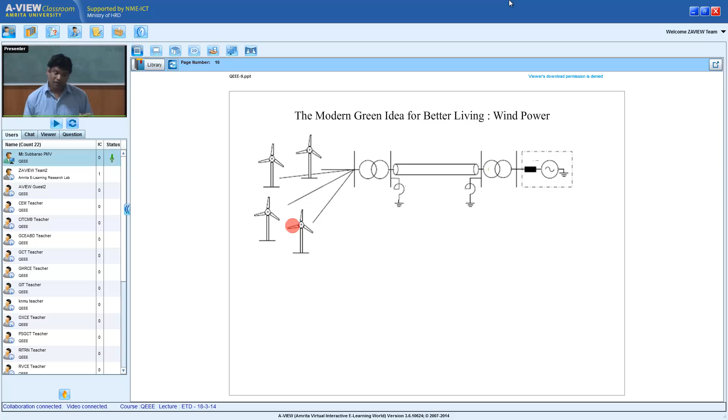You see this one. A system will change its state. The system is ready to change its state. But whenever there is a change in state of the system, there are some happenings. And these are the happenings which will change our lifestyle. You need to assess what happening you want when the system is changing state. Or for a given happening, what kind of change of state in the system will be beneficial. In fact, the first culmination of all the knowledge is to create these kinds of things.

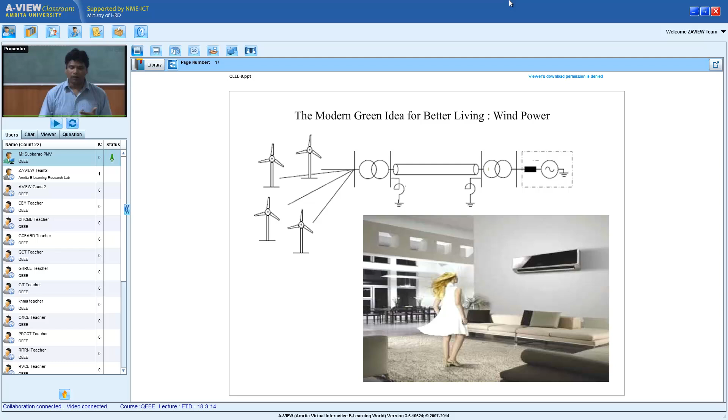That's why I'm questioning, what is happening whenever there is a change in state? Can you recognize what all can happen? Then you can choose. Sometimes I want this to happen, sometimes I want that to happen, because in summer I want this, in winter I want that. Some other weather, some other requirement. Very important: the system will change its state in PVT, pressure, volume, temperature. But when it is changing its state, you are looking for different benefits. A system may change the same state from 1 to 2, but sometimes you are interested in one happening, sometimes in the other happening.

You see, are any of these happenings useful for the engineering world? That is the question. Why am I making the system change, why am I concentrating on the change of state of a system? Why are all these happenings useful for the engineering world? What are the main engineering requirements?

Does it consume any resource? Then I need to think techno-economically. Does it consume any resource for which I have to pay money, or is it naturally coming? If I have to pay for the happening, then I have to be very careful about what I am losing and what I am gaining.

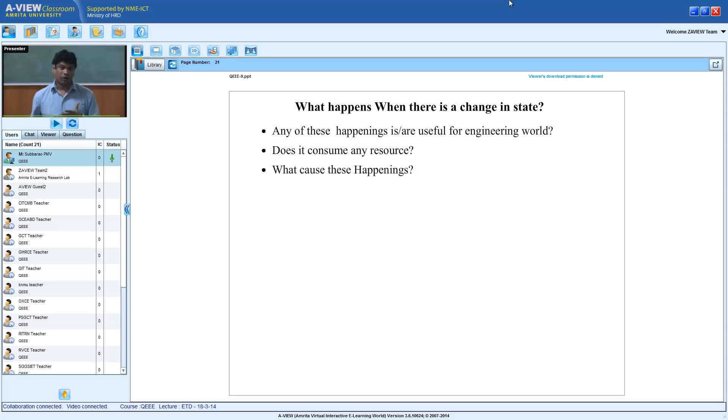They evolved over a few hundred years to come up with such a beautiful idea called a badgir. How many generations worked together to perfect such a nice system so that they could live happily in such a hot, dry environment without any problem. Only then did they start living happily. Otherwise, they would have been subjected to many diseases.

All these happenings are creating a thermal inequilibrium, isn't it? The wind has a uniform temperature, but the moment there is a wind catcher in between, there is an inequilibrium created in the wind. The wind is now changing its temperature - thermal inequilibrium. I'm purposefully creating thermal inequilibrium because that is good for me.

I was subjected to a very hot environment and I'm not happy. I want to change, disturb this equilibrium, and subject it to cold air. Then I'll evolve into the next inequilibrium. So to enjoy, I am creating a thermal inequilibrium, or sometimes I may create a mechanical inequilibrium. If the wind has uniform velocity and uniform pressure everywhere, I get nothing.

Suppose if I put a windmill, what will it do? It will create a mechanical inequilibrium. The wind will lose its kinetic energy, the wind will lose its pressure, and because of that, what am I getting? The difference of energy I am getting goes to the rotor, and that rotor can be used to drive the generator - I'll get electricity.

So by changing the temperature of the wind, I can enjoy a nice environment. By changing the mechanical properties, I can get electrical power. Sometimes I may change the chemical inequilibrium too.

After catching the wind, if I don't think about the wind passing over a water pool, I won't get any benefit. The whole idea of constructing such a beautiful wind catcher will not serve its purpose. Imagine that wind catcher with and without a water pool at the center. If there is no water pool in the center, the people living in the house will be subjected to some air velocity, but that air is hot, and that is not a good thing.

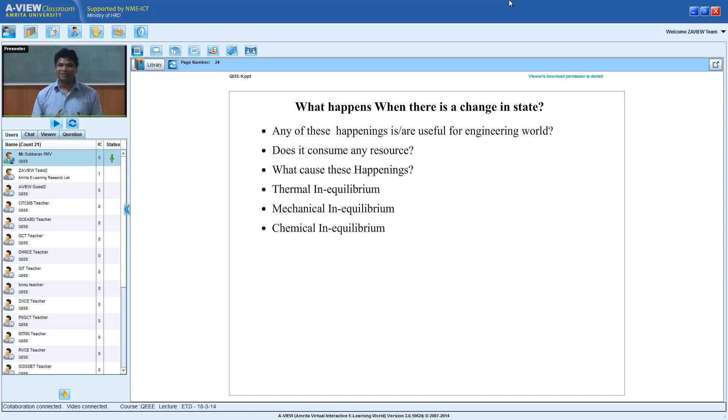So unless I create an inequilibrium in the system, I cannot enjoy. All my enjoyments somehow disturb the equilibrium. The zeroth law talks about things tending towards equilibrium, but a human wants always the opposite of what happens - whatever he can enjoy is by creating an inequilibrium.

He cannot be in equilibrium with a hot environment, and he cannot be in equilibrium with a cold environment - both are dangerous to him. He has to create an inequilibrium, which requires a change of state, which requires consumption of a resource, and which requires a physical structure to be invented, like a badgir.

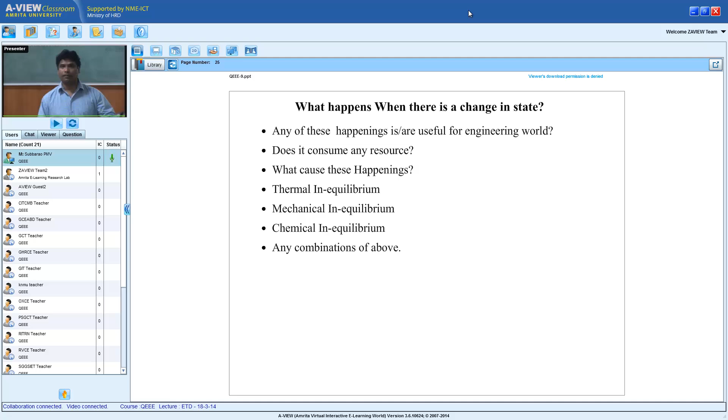So without inventing that, it just doesn't happen. So any combination of the above can occur - I may have a thermal and mechanical inequilibrium, I may be interested in a mechanical and chemical inequilibrium, or a chemical and thermal inequilibrium.

So you can have a different thing. These happenings are actions, path functions, or interactions. All these happenings are kind of an action - something happening to my body, something happening to the air, something happening. All these are called actions. Strictly speaking, all these happenings are literally verbs, not nouns at all. And they're all totally a path function.

Same wind velocity, same wind kinetic energy. In one case, I changed the path and got a cooling effect. In the other case, I innovated a wind turbine doing some other process - I'm getting mechanical power and electrical power. So the happenings and actions depend upon how you take the system from state 1 to state 2. Whenever you change state 1 to state 2, the path followed in between will decide what kind of happening occurs - is it required or useless.

Now, these are present only during the change of state. All these happenings will occur only when there is a change of state. If the system doesn't change its state, there is no happening, no enjoyment, no inequilibrium. Unless there is an inequilibrium, there is nothing like a happening which I enjoy. You cannot generate mechanical power from the wind unless you change the state of the wind. You need to see all human activities - understand something, try to do the opposite, then you will enjoy the deal.

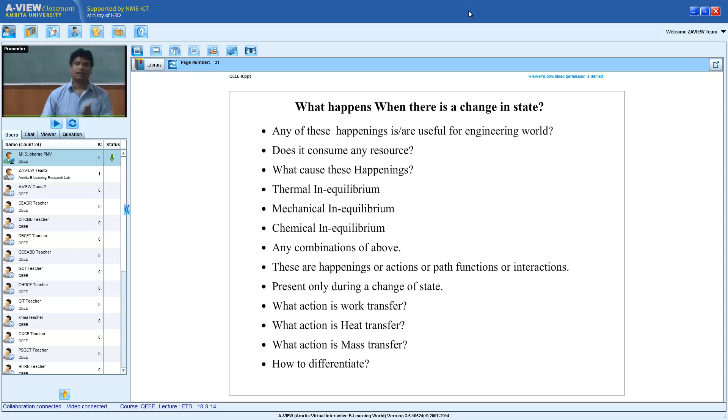So that's how you need to know what these three actions are, how to precisely identify them, and how to differentiate whether a given happening is a work transfer, a heat transfer, or some kind of species transfer. Mass transfer means a kind of concentration inequilibrium process.

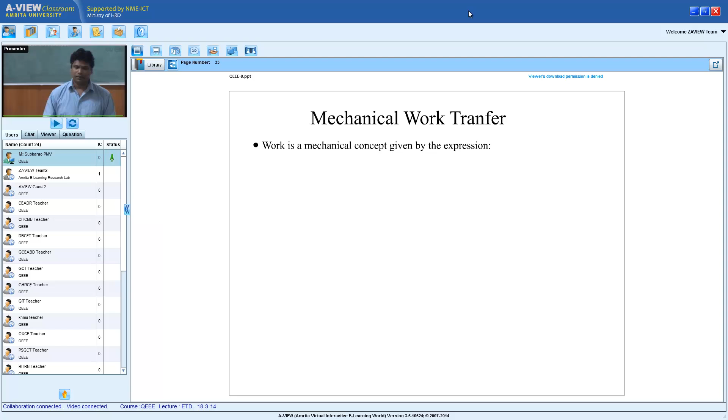Now first let us talk about the mechanical work transfer which is well taught to us in school. Perhaps as I was saying, the entire reason thermodynamics evolved is people wanted motion, and motion comes out of mechanical work. That's how even in school, work is a mechanical concept given by the expression - what is work defined as? Work is if there is a force, if the force is continuously getting displaced...

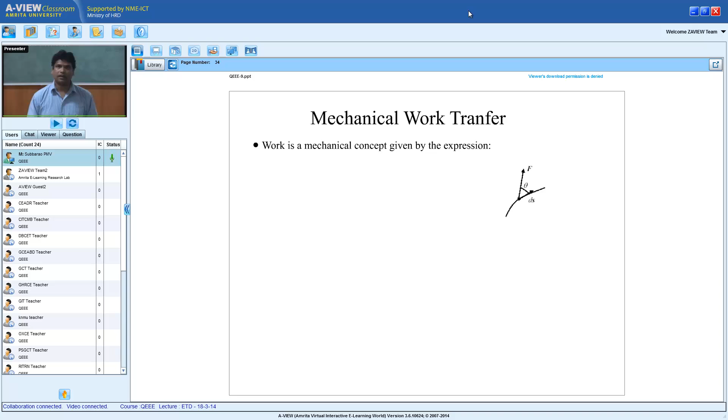And if the force has some component in the direction of motion, then only there will be a work transfer. All of you know work is said to be done by a force when there is a displacement of force in its own direction. If the displacement of force in the direction of force is zero, then there is no work done at all - there has to be a displacement in the direction of force. That is what is called mechanical work. Most of us are interested in this kind of mechanical work to start with.

A small infinitesimal work done is defined as the dot product or scalar product of a force vector multiplied by a small displacement. Here ds is the infinitesimal displacement and f is the magnitude of the force, and work is defined by the dot product only. Why? If the force and displacement are not in the same direction, you get nothing. That is the mechanical work which we are not required to consider now.

Now we need to understand: if I want a finite work, both force and displacement are vectors, and by changing the displacement of a force continuously I can get work, or by changing the force value continuously I can also get work. There are two ways to get work. So I need to understand explicitly how I can generate a force using a natural resource, how system pressure, volume, temperature will create a force. At the end of the day I want to create force through a system or substance, and that's how one has to have a global link between ultimate mechanical work and what the system can generate.

All of you know F is a force vector, S is a displacement vector, then work is a scalar product. Unless there is a component in the direction of force, there is no work at all. The dot product is very important, cos theta. The force component along the displacement vector only can do the work, isn't it? If the force is totally in a perpendicular direction, you can't do any work at all, and you need to be very careful in designing everything.

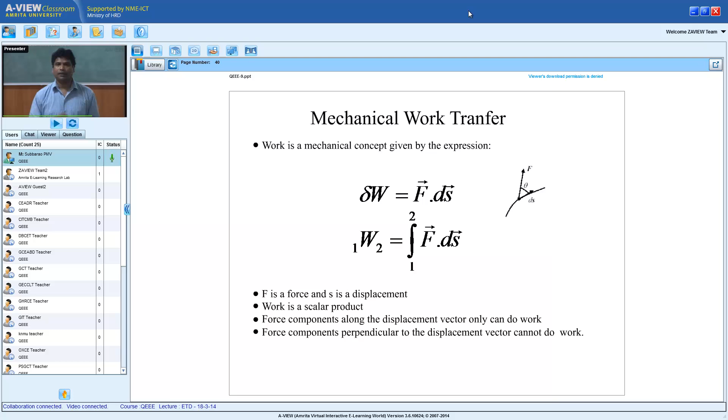So the force component perpendicular to the displacement vector cannot do work at all. One has to understand this, and this relationship will be useful to find the work required to raise a weight. Let me explain this entire thing in a simple way. Give me the whiteboard.

Now you see this simplest device, after all how much engineering, how many years we'll learn. Let us say a person is carrying a big suitcase on his head and walking through, and fundamentally he is not doing any work at all. If at all you want to prove that he is doing work because of the weight, the friction force between his leg and the floor is increasing. Higher the force, higher the displacement. This is the most ridiculous way of lifting a weight.

Again, many people say he is not doing work at all because the weight is in this direction while he is moving in another direction, and this is the displacement vector. Now what is the best way to do this? This is a stupid way, and it took so many years to invent a better thing.

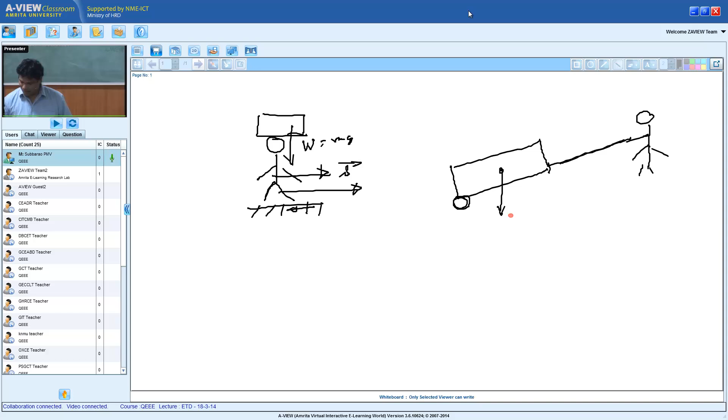What is the better condition? If you pay a little more, there are wheels and a handle, and you will nicely walk through carrying this one. Now you see, the weight is in this direction, and depending on the weight equal to mg, there is a friction force which is coming - this is the rolling friction. Now why are you doing the work? Because there is a displacement in the direction of the force. Unless you apply a force equal and opposite to this one, you cannot move it, isn't it?

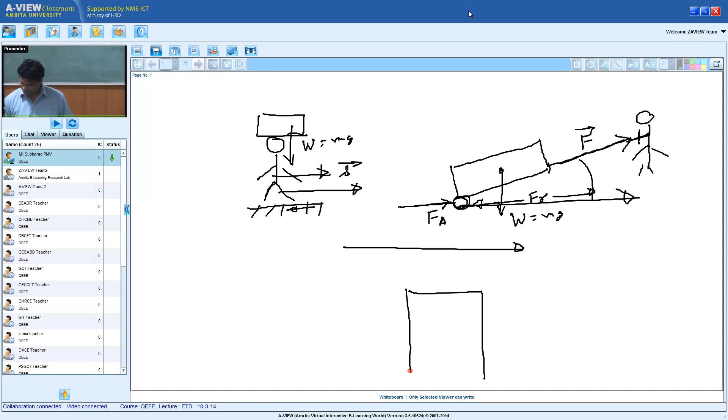So this is the extra force you are applying, and that force gets displaced in this direction. At the end of the day, what is the force doing the work? You are applying a large force vector, and only the component in this direction does the work. Unnecessarily there is stress on your hands because of how you're carrying it. What is the most modern, costliest suitcase you have? A 4-wheel suitcase with a wheel here and a small handle like this, and the person will just push it. So the total force which I am applying with my hand or muscles is doing work.

And to do this work, I need a little energy to be consumed. I need to spoil some muscles. Now, so in all the cases, I'm doing the work. I'm shifting the entire suitcase from place 1 to place 2.

Now you see this idea, appreciating the scalar product, and I wonder how many years human intelligence takes. Why did we not invent the four-wheel suitcase immediately? Okay, so very costly suitcases have this four-wheel thing. So the ultimate work required is the same, but depending on this one, you will strain somebody. This fellow will suffer a lot to do the work, and this is relatively easy. This is the easiest. Even an old person can take a large weight without any problem at all.

So all this is because the work which you are doing is only this work. So this is the only work you are doing, and if you are applying a very large force, but the component of that force in the direction of displacement is very small, obviously you are wasting all your resources. You are troubling yourself, you are breaking your bones. All this is a stupid thing. So that's how the scalar product has so much implication.

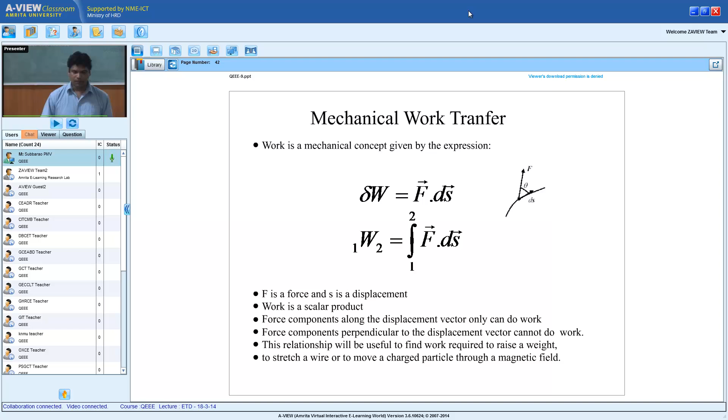That's how thermodynamics came up with a nice concept to have a broader version of this particular work definition. To stretch a wire or to move a charged particle through a magnetic field, all these things are a kind of force into displacement. Either raising of a weight, stretching a wire, or a charged particle moving in a magnetic field, all these are the scalar product of force and displacement. So thermodynamics wanted something more global. Thermodynamics has a wiser and broader definition.

And only force into displacement as work is not enough, because many times things may not be straightforward. That's how a thermodynamic system doing work is defined very differently: how to define work in terms of system, surroundings, and properties of the system. Unless there is a change in a property of a system, there can't be work, there can't be a happening. And whenever there is a happening, how is the system changing, how are the surroundings changing, what is the interaction between them? Force into displacement doesn't talk about all these things.

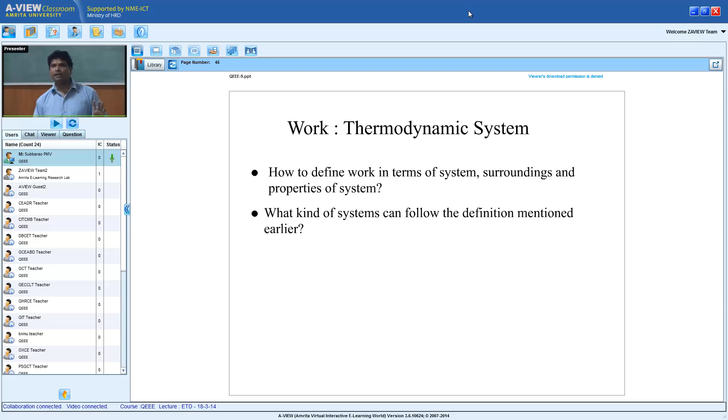Whenever I say that work is the scalar product of force and displacement, I'm not bringing the holistic way of developing a system to do work. So thermodynamics wanted a more perfect definition. And also, what kind of systems can follow the definition of mechanical work? Can I say all thermodynamic systems are obviously doing force into displacement? All the works we enjoy may clearly have force multiplied by displacement, or inherently they may have it, but explicitly it is difficult to identify.

A force acting on a solid body, moving in the direction of the force itself, will tell it explicitly. Now imagine somebody is doing work, somebody is burning all his calories, depending on your definition.

Can you go back to the whiteboard please?

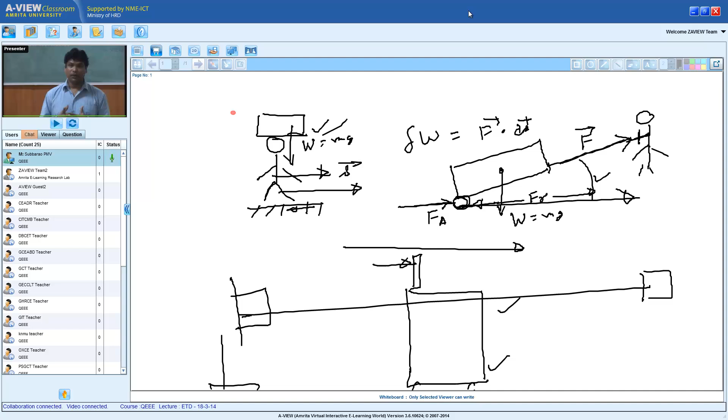You see this particular one: at the end of the day, there is stress, there is power, there is energy of muscles consumed. But one says there is no work, one says there is partial work, one is total work. So the mechanical work definition is very limited. It doesn't take the holistic perspective of doing many things. That's why thermodynamics wanted something more global.

Go back to the lecture please.

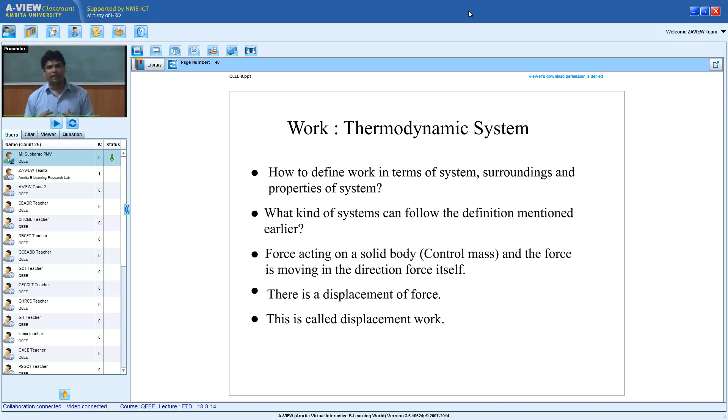Okay, so they wanted more perfect definitions. How to get the perfect definition is the question. There is a displacement of force, and this is called displacement work. Whatever mechanical work you learned in physics is called displacement work. Why? There is clearly a force displaced, and you clearly see that there is a force and the force is displaced. But in many things, the displacement of force is not explicit.

Sometimes it is almost impossible to find out the force and the displacement of the force, but you are getting the same effect as a force into displacement. So in all those cases, quantification of work will become very difficult, or people will wrongly interpret it. So what property of the system is required to compute the work? Whenever I want to know the work done, which properties of the system should be used to calculate that it has done this much work?

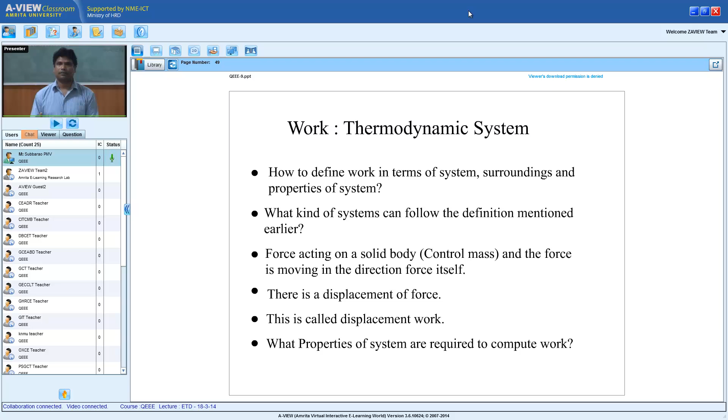Okay, so that's how the people, or thermodynamics, wanted a more global thing: a need for a general definition of work transfer, not just the scalar product of force and displacement. No doubt, inherently, when I dig and understand for 5 days, 10 days, or 100 days, I may see force into displacement. But that is not the right way. You need to have a definition which will be more crisp.

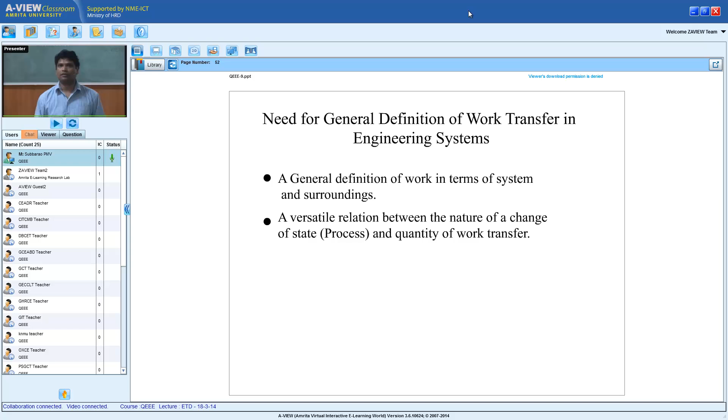A general definition of work in terms of system and surroundings. So a definition should have what is happening to the system and what is happening to the surroundings. This is very important. Without having these two, defining a work transfer is not complete knowledge. A versatile relation between the nature of a change of state and the quantity of work transfer. This is also very important. What is the path followed by the system because of the change of state? How is it influencing the magnitude of work transfer? One has to understand, because at the end of the day I am consuming some resources.

Okay, so let me talk a little more. To identify more actions other than displacement work: there may be many actions which are equivalent to raising of a weight. In all these there is work, but I need to know more than force into displacement. I want a better definition. So what is the difference in capability? This is very important to know.

If I have coal which has a calorific value of 25 kilojoules, and I have an electric battery that also has 25 kilojoules of electricity, can I say both of them can do the same amount of work transfer? What is the difference between these two? So your definition has to be much deeper than just force into displacement.

So suppose I have 25 kilojoules of kinetic energy and 25 kilojoules of potential energy, are they the same? Or is 25 kilojoules of kinetic energy better than 25 kilojoules of potential energy? All these things are very important to define the happening called work transfer.

So work done by a reciprocating engine or work done by a jet engine, can I say both are almost the same? If it is a reciprocating engine, how do I calculate force and displacement? If it is a jet engine, how do I calculate the force and displacement? Can I say that unless the engine is attached to the car, I cannot get the force into displacement? Unless the engine is connected to the aircraft, I don't know the work done by the engine. That is very difficult. While developing the engine itself, I should know what work transfer is possible.

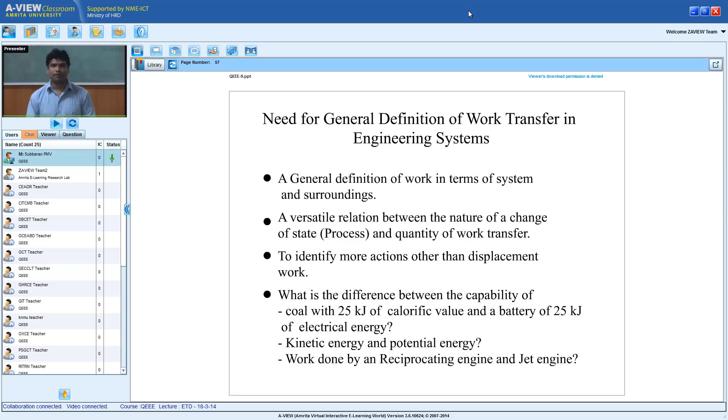So that's how people wanted a very general definition, because of so many arguments. Why am I giving so many arguments? Unless you have so many questions, you will not appreciate this elaborate definition of thermodynamic work. As I said, an international committee under the leadership of Maxwell and great scientists accepted this definition. See the definition, very important. This is one of the most powerful definitions, which led to many innovations. All are equivalent to each other; they may not be exactly the same. So what is the definition?

Positive work is done by a system during a given process. Very important. What is the meaning of a given process? A system should change its state step by step, from one state to another. To reach state 1 to state 2, there is a perfect relation between how the pressure, volume, and temperature are changing. That is what is called a process. But when do I say a given process is doing work? Only when there is force into displacement and the scalar product is non-zero? No, no, no. You need not be so precise. You have to be more generic.

What is that generic? You see the very beautiful sentence created by these people: when the sole effect external to the system could be reduced to the raising of a weight. A very complex definition. Now, the scalar product of force into displacement is so easy. But if you use that one, you cannot develop so many products, so many possible work equivalents.

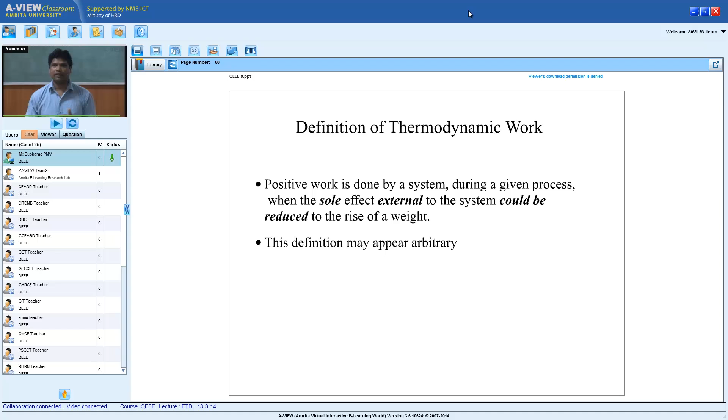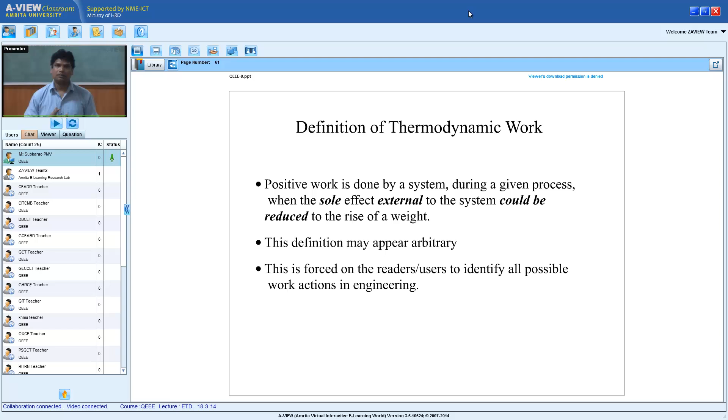And this is forced on the readers to identify all possible work actions in engineering. Why such a definition is forced on us is that so many actions do not look like a scalar product of force and displacement, but they are actually equivalent to that.

In fact, I was telling you Thomas Savery's story. Thomas Savery was working in an army, and at that time the army was using boats driven by slaves using the paddles. So he said, no, why are you treating them like this? It is cruel to use so many workers rowing your boat. What I want is to invent a wheel which will drive the entire vehicle. That wheel can be driven by something else.

Then he was thrown out of the army. Are you stupid? How can you have work without a force and displacement explicitly? The wheel is going round and round and round. Where is the force? What is this nonsense? You must be crazy, you must be a mad fellow. The great Thomas Savery was thrown out of the army because they could not understand that anything else can also do work. And he came out and developed the wheel which can drive the boat. How to drive the wheel? He invented a steam engine which eventually drove the entire world.

Very important. If you depend upon Newton's laws, like force into displacement only, perhaps the number of products possible will be very limited. You have to catch so many slaves who will apply a force in the direction of motion by rowing the entire boat. That is the only way of getting the work done. There is no other work at all.

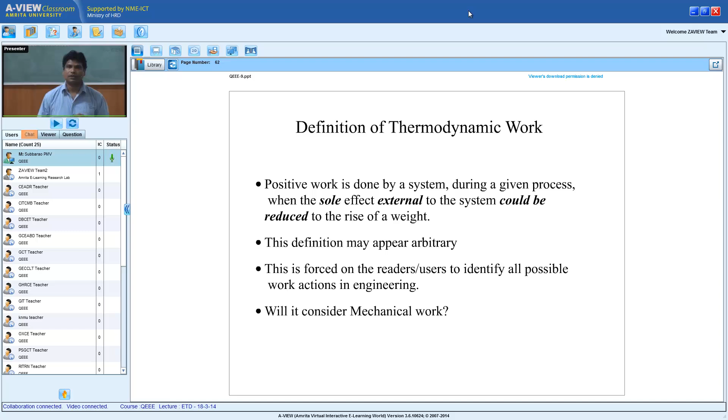So will it consider mechanical work or not? Whatever this definition, will it consider mechanical work also as work or not? Any effect which is equivalent to raising of a weight should be called work. That is the precise statement. Unless it proves that force into displacement is also a part of this, I cannot consider this to be work. So that's how people wanted to do a construction.

Let us take a perfect mechanical work generating system, exactly force into displacement. You can take rowing a boat or anything, but I am taking one fascinating example of perfect force and displacement in the direction of force. The example I am taking is a missile launcher. All of you know this is called a missile launcher, which will push the missile out of it. And you see, the force and the displacement are in the same direction.

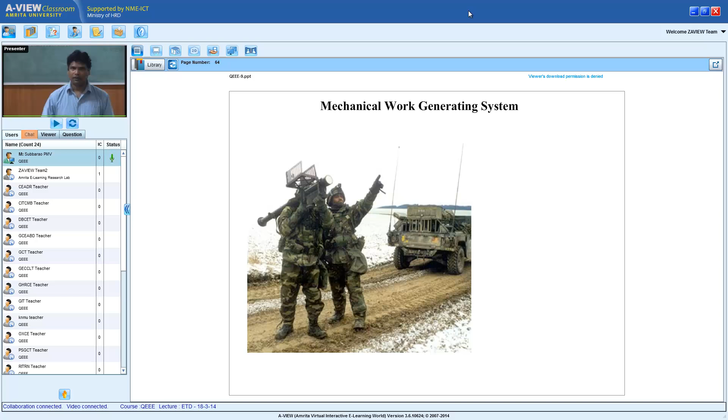Let me show you the working of this particular one. This is the telescope to launch it. This is called a launch tube, and inside it there is a missile. When you push this trigger, it will eject the entire thing. These are called ballistic missiles, which are very popular in defense systems. You see, a missile comes out of this launcher.

Now I am making a configuration to explain. The missile launcher is the system. The missile is the surrounding. Before triggering, this is the position of the entire thing. And the moment I trigger it, this is the trigger. If I trigger it, now you see, the displacement of the surroundings has increased.

You can see this particular one. The initial surrounding was at this point to this point. After triggering, the entire surrounding has moved. Now you see this one, what is the system? The missile launcher. What is the surrounding? Missile. And the missile launcher, which is a system, and missile, which is a surrounding, these two are interacting with each other. That interaction is something like: after triggering, there is a plunger coming out and pushing the entire missile out.

Can I call this a mechanical work? Here you can see explicitly there is a force F getting displaced through a displacement S. Obviously there is a force into displacement. In fact, it is a perfect force into displacement because both are collinear. The force is moving along its own direction. There is no component problem, nothing. Both are collinear. So it is obviously a mechanical work.

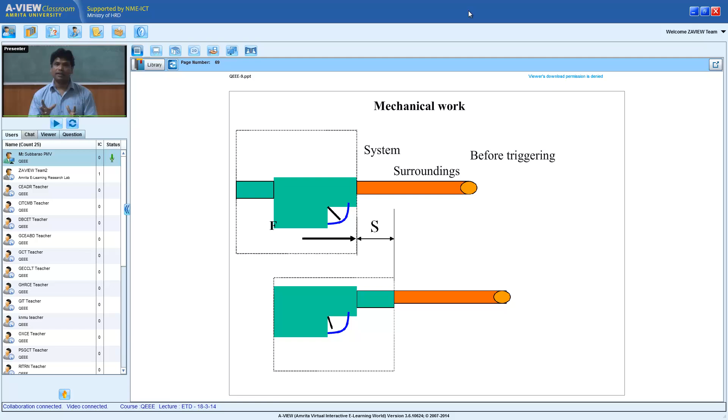Will the thermodynamic work consider this to be a work? Because the thermodynamic work doesn't say force into displacement explicitly. What it says is something like: the sole effect external to the system, meaning on the surroundings, could be reduced to raising of a weight. This entire effect should be translated into raising of a weight. Then only I can call it a thermodynamic work. Mechanical work says force into displacement, and thermodynamic work always demands raising of a weight.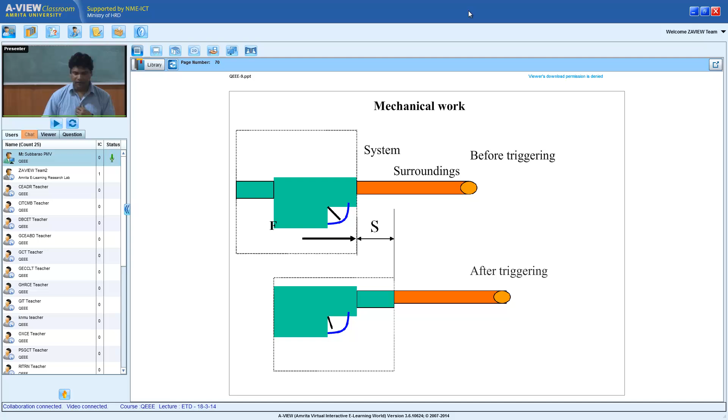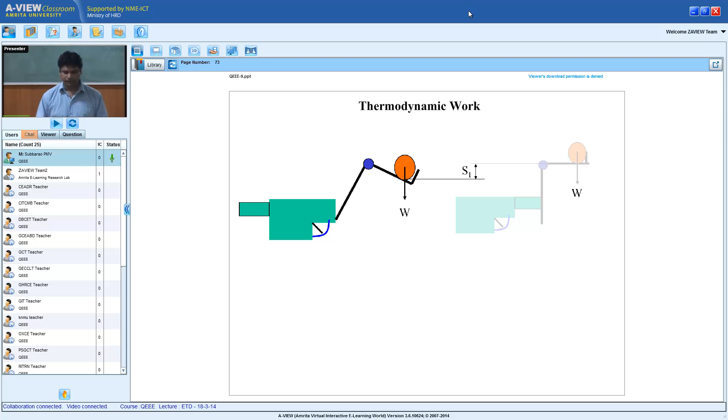Now you see this one, I am making a construction. So instead of a missile, I am replacing the missile environment with a special environment, which is an L kind of fulcrum having a big weight on it. Okay, so I have replaced the missile surrounding with another surrounding, and this is before triggering. Now you see this particular one. So the moment I trigger it, what is happening? The entire weight will get lifted. Now you see, there is a displacement, and this effect is called the raising of a weight.

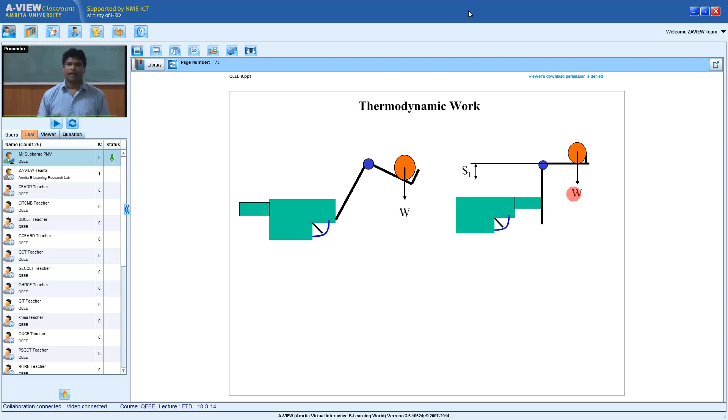Now all of us can easily say that whatever the system can do as a mechanical work, the same thing is done equivalent to this. What is the meaning of the definition? That this raising of weight should be equivalent to that mechanical work. So whatever this is producing is equivalent to raising of weight. That's what is called a thermodynamic work. You don't have to look for the force, displacements, etc. Any effect totally, 100% equivalent to a raise of weight, can be a work done.

Now let me explain point by point. So the mechanical work is a thermodynamic work and vice versa. Why? Because all the mechanical work can be translated into raise of a weight. You see this one, the displacement of the plunger is the same. Same displacement of the plunger with the same force did an equivalent work by lifting the weight. So there is no difference between mechanical work and thermodynamic work. Because thermodynamic work satisfies the mechanical work, at the first level I can accept this definition, and it talks about more.

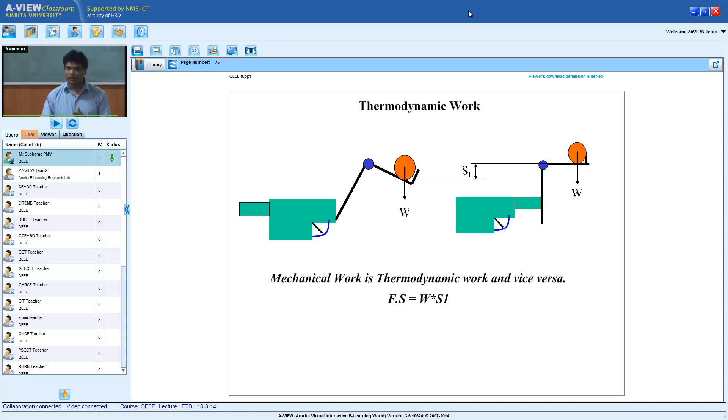In the first case, as a mechanical work definition, it is force into S, F into S. But in the thermodynamic work, a weight W is raised through a distance of S1, isn't it? So these two are equivalent. So 100%, the entire F into S is equal to the raising of the weight. That is what is called "could be reduced to", meaning 100%. Sole effect is the word which is used in the definition.

Similarly, let us say I have a battery, and I am using this particular battery coupled to a room convector. Now if I take this particular definition, what is crossing the boundary? And there is a confusion. What is crossing the boundary?

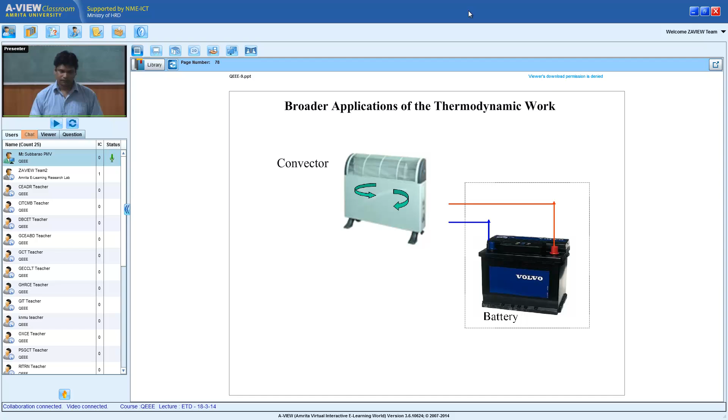Okay? So can I get a pen here? On the document. Okay. Now, is it a pen?

Now, suppose I draw a boundary around the convector, okay. Now, I'll ask what is crossing from the convector to the room.

And another question is, who is responsible for whatever is crossing from the convector to the room after all this battery? Okay, this is the battery whose boundary, this particular boundary, whichever you are looking at, already see there is something crossing the battery, but this is responsible for something else crossing the convector. Now the question is, whatever is crossing the boundary of a battery, is it the same as whatever is crossing the convector?

Can I say these two are equivalent? At the end of the day, they are equal in magnitude perhaps. So this is where the thermodynamic definition works. Whatever is crossing the convector boundary, whatever is crossing the boundary of the battery, are they the same or are they different? What is crossing the battery? Because here you don't see any force and displacement explicitly. And I don't know how to interpret this one. There are many things.

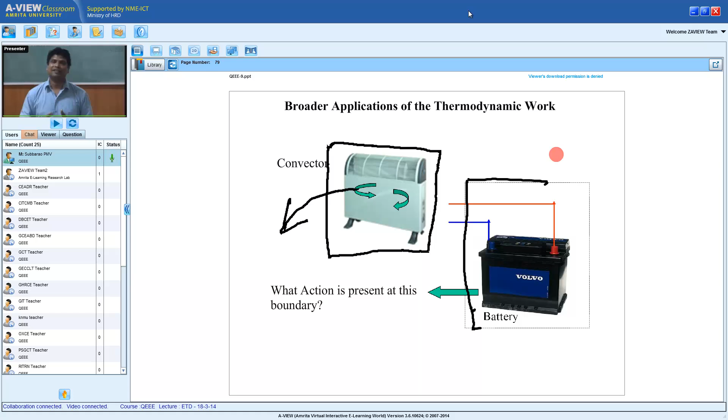Otherwise, unless there is a Faraday, nobody knows what is the force developed due to the charged electrons passing through a conductor. Where is the force? I can't see a force explicitly. The great Faraday could think of a new force, which is what is called EMF, electromotive force, and ordinary people cannot judge it at all. That's why you need a simpler definition between these two things.

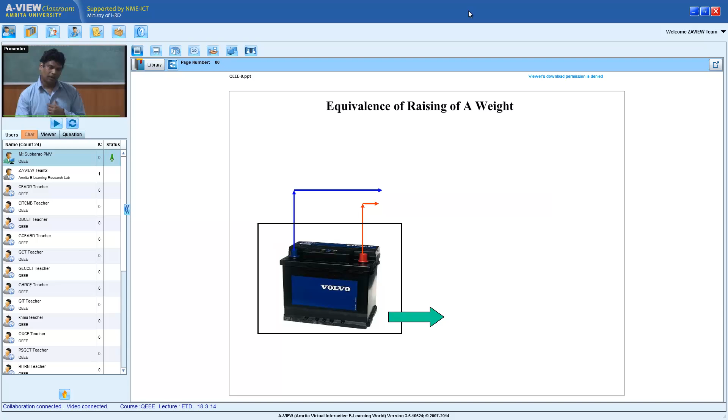Now you see, first I'll take the battery. Whatever effect is crossing the battery, I'm giving it to an electric motor. To the electric motor, I'm connecting a pulley and a weight. Now the sole effect crossing the boundary of the battery can be used for raising a weight. So according to thermodynamics, by connecting a motor and pulley, all the effect crossing the boundary of a battery can be translated into raising a weight. So it looks like even the battery is doing work, though I don't see any force or displacement.

The thermodynamic definition says that it need not be raising of a weight always. But whatever the effect crossing the boundary may be, if I wish, it can also be used to raise a weight. I may or may not always use it to do the work. So that is the greatness of thermodynamic work. So that's how this definition should be discussed thoroughly. I'm coming to this one.

So there are three terms which I italicized and bolded. The first one is sole. What is the meaning of sole in the definition? What is the meaning of external to? And the third is could be reduced to, not actually only rise of a weight.

These three terms are very powerful and make the thermodynamic definition. If this definition was available in the 16th century, perhaps Thomas Savery wouldn't have been thrown out of the army, he would have been given a lot of funding to do that work as early as possible, and we would have invented maybe the entire thing 100 years before. So a small definition and thinking is very important. Nowadays we take everything for granted.

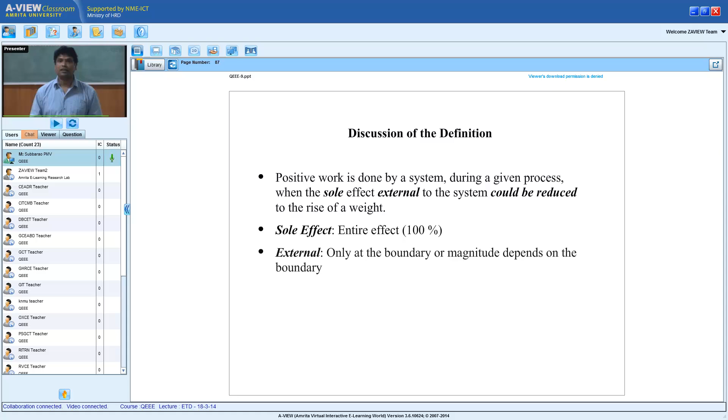The first one is the sole effect. The sole effect means 100% of the effect crossing the boundary, which is happening due to the process. That 100% should be translated. That is the first point, the sole effect. The second one is external to, very important. You need to consider system to surrounding. What is happening within the system is none of our business. What is happening within the surrounding is also none of our business.

System to surrounding means there has to be explicitly a launcher and missile, explicitly the battery and the convector. There has to be a system and surrounding. The effect I am taking is outside the system, external to, meaning only at the boundary. Within the system there is nothing like work. So the thermodynamic definition says unless there is a system and surrounding, you can't define work transfer at all. If I am throwing this, I need to know who is the system, who is the surrounding. Without knowing that, nothing can be done.

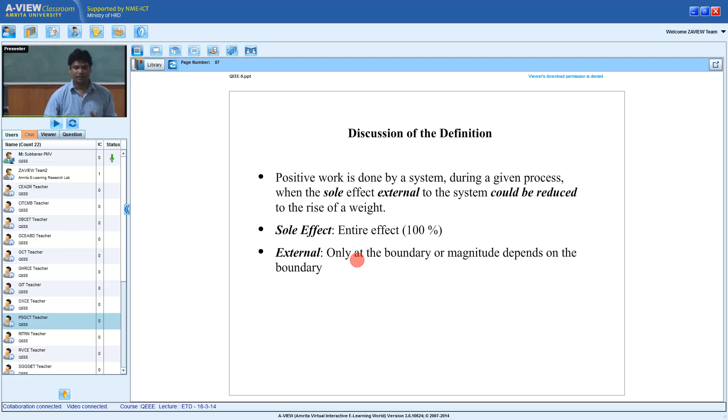The third one is could be reduced to. So there is no rule that every time it should be force into displacement, and it need not always be raising of a weight. Unless there is raising of a weight, unless there is force into displacement, I cannot call it work? No. The effect could be anything, but that effect, 100%, is equivalent to raising a weight. So there is no rule that there must be force into displacement. A boat can be driven by a wheel.

The wheel is rotating at some RPM and developing a torque. This entire torque into speed is equivalent to force into displacement. Then what is the big decision?

You don't have to capture 100 slaves, beat them, make them row your boats again and again, kill them literally. That is not fair.

If I don't understand, you can have a wheel, and the wheel can be rotated by anything. Perhaps I can have a windmill, and that windmill can rotate the entire wheel. Now I don't have to depend upon many people, instead of having thousands of curtains which try to stop the wind and get pushed, which is ridiculous. What can I do?

I can have a big windmill which will take the wind power and generate a torque. The torque is used to rotate a wheel, and the wheel will apply the force into displacement. Why? Because all of them are equivalent to raising of a weight. Whatever you are getting is equivalent to raising of a weight.

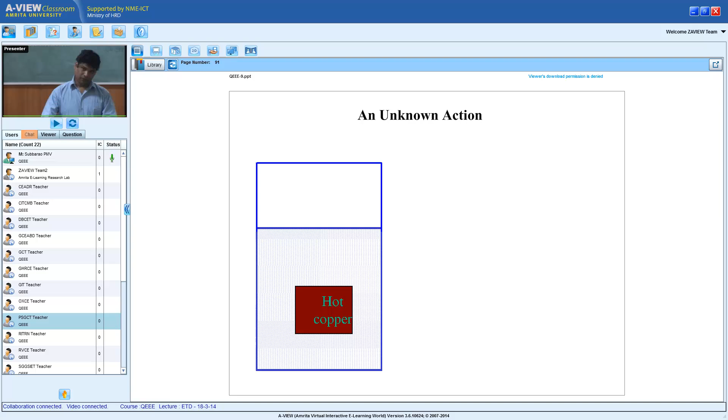Let us say I have a closed cylinder with some water at some temperature, inside which I am dropping a hot copper, a very hot copper. Obviously from the copper to the water there is some action happening, because it is a hot copper, water may become very hot, the way we discussed in the last class. So corresponding to this pressure there is a saturation temperature. When the water temperature crosses the saturation temperature, what will happen?

There may be bubbling and boiling, etc. Now the question is, whatever transferred here and generated steam, can I call it a work transfer? I don't know exactly what it is. Suppose we know it's heat transfer by chance, but thermodynamics wants it to be known perfectly.

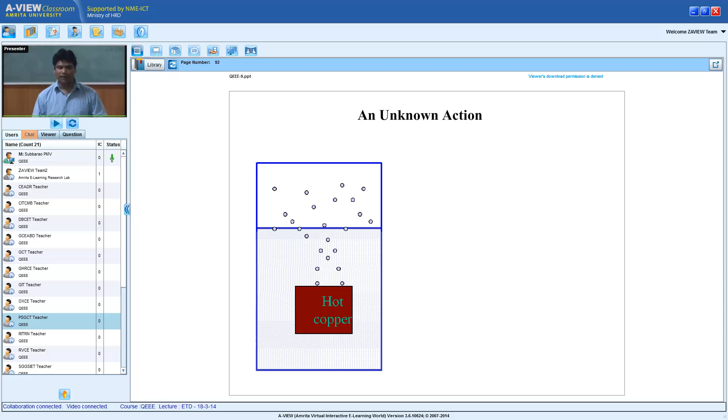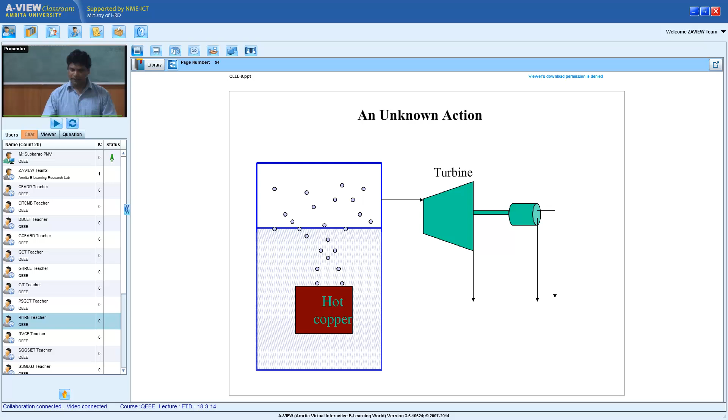Suppose let us use this steam and give it to a turbine. This turbine will rotate a generator. Can we use it to? Now you see, the steam is entering the turbine, leaving the turbine, and because of that it can drive a generator, and the generator is supplying electricity.

Now this electricity is same as that battery. So instead of that battery, I can use the generator to run our convector, the same convector. Now the very interesting part of the entire story is, does this entire elaborated system also develop the same as the battery? Can I say what is crossing the hot copper is same as what was crossing the battery? The magnitude of this one and the magnitude of this one will be same. Okay, this is the one you can look into.

See, I'm doing the convector in a long way. I have a hot copper block, I'm dropping the hot copper inside a water tank that is giving steam. That steam I'm using to drive a turbine. A moving turbine will drive a generator, and the generated electricity I can use for the convector.

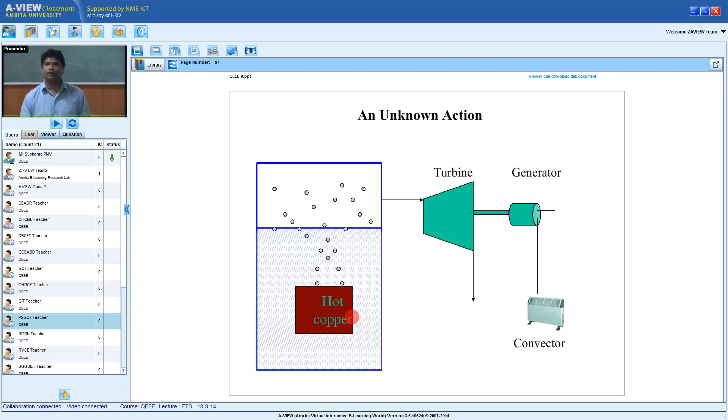So a simple battery is replaced by so many things. Can I say whatever is crossing the hot copper block is same as whatever is crossing the battery? And how do you justify whether it is a work transfer or not is very interesting, and I request the teachers to explain this, why what is crossing the boundary of the copper block cannot be called the same as whatever is crossing the battery. You need to say that whatever steam is produced cannot be converted into this.

Now I am giving the definition of negative work, because the definition talks about the positive effect. When a system does a positive work, its surroundings will do an equal quantity of negative work. That is very important. Suppose if the system does a negative work, surroundings will do the positive work, so one need not have a separate definition for this. Conversely, when the surroundings do a positive work, the system does an equal quantity of negative work. So the positive work and negative work are equal, and always exist together.